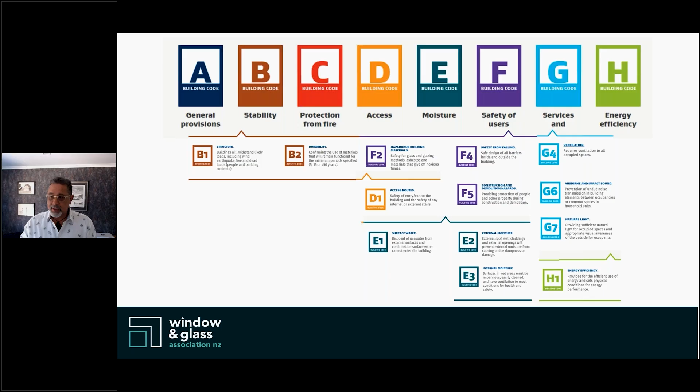It's kind of symbolic that these two icons are set so far apart on the slide, because like most parts of the code, they're typically considered very individually. So initially, we're going to do the same, and we'll start by having a quick look at E2.

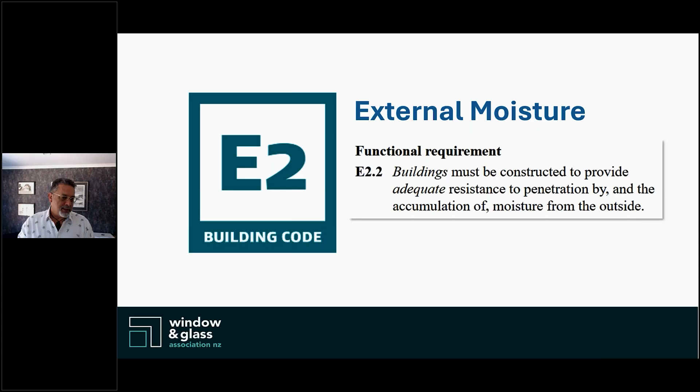So E2, the external moisture clause from our building code, is basically the regulation that sets out how our buildings should manage external moisture. The functional requirement of E2, and I really like this paragraph, is that buildings must be constructed to provide adequate resistance to penetration by and the accumulation of moisture from the outside. That is exactly what we're trying to do every time we look at a window detail. We're trying to keep the water out and make sure it doesn't accumulate in that space.

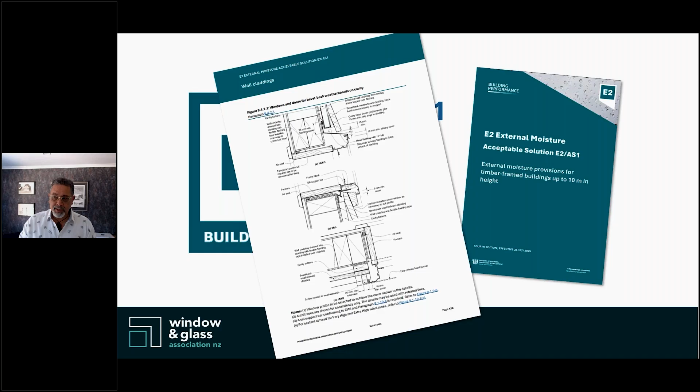Of course, E2AS1 is where the acceptable solutions are listed and nominated, which looks at all junctions of the building envelope, not just those relating to windows and doors. But there's a significant section in there relating to my favorite subject.

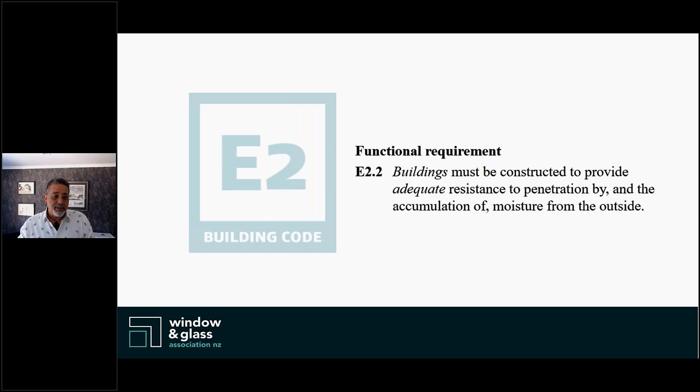Okay, so with E2 and E2AS1, there's a bit of a story I'd like to go through. As I say, the intent of E2 is to keep external water on the outside of the building, and we've not always done a great job of that, to be fair.

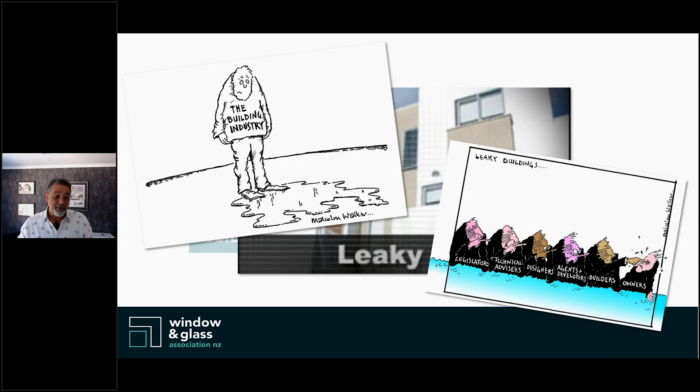In the early 2000s, it became very public, our $2 billion leaky home syndrome. With that kind of pressure, the whole building industry was compelled to develop solutions to a very public but very, very real situation. At the time, building consultants Prendos published some analysis of their experiences, and they were actually blasted for doing this in the newspapers, for exaggerating the situation, which turned out to be completely untrue.

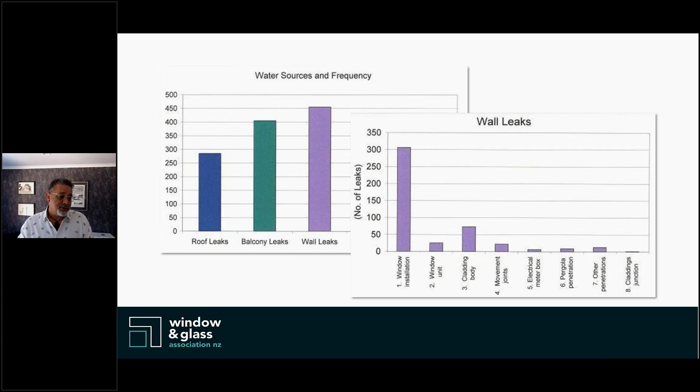The window industry collectively took note of this information and decided to take control of this particular area - the space between the window and the building envelope, the installation. We decided we needed to help out and develop a better method of installing windows, given the pressures that were going on at the time.

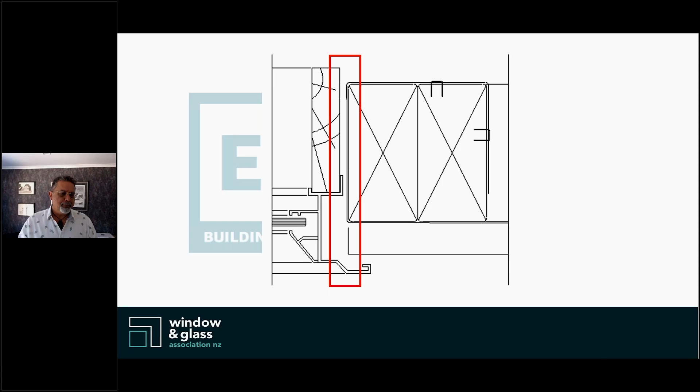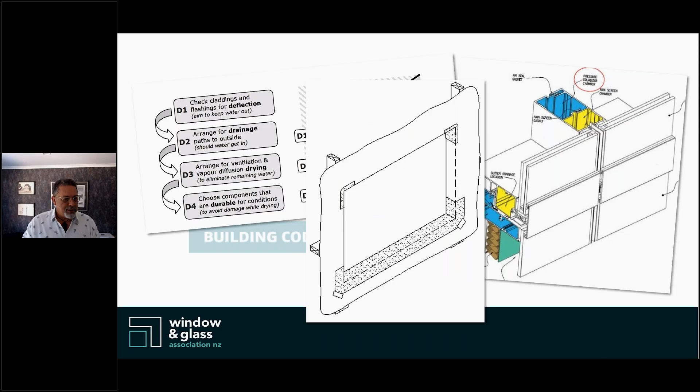We considered the 4 Ds. We took what we knew about pressure equalization from curtain wall design, and we acknowledged that we needed to protect the opening, remembering, of course, at the time that the code allowed for the use of untreated timber.

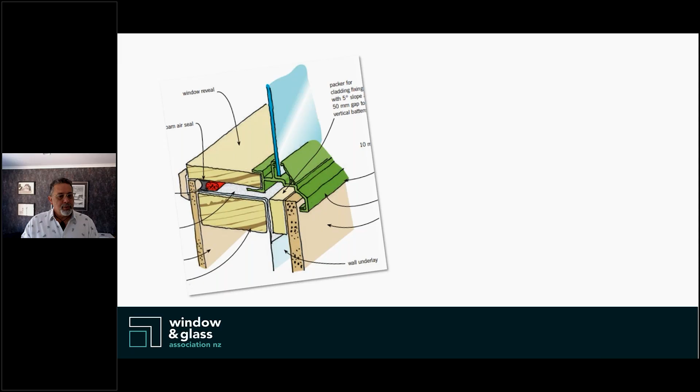At the same time, BRANZ were evaluating the use of cavities between our framing and our cladding, which pushed the window out of the building and away from the support of the framing. So our solution to that was to develop a support bar that not only supported the weight of the window, but also provided adequate drainage and ventilation paths for the window cavity, to help that pressure equalization around the window cavity and help keep water out of it.

In 2005, we published this as WANZ WIS, the Window Association of New Zealand Window Installation System. At the same time, the DBH, as MBIE were then, published their version of our details. We talked to them about the details, but there wasn't complete agreement across all parties, so they published their version in E2AS1, the 2nd edition.

And for a long time, we actually competed in the market where some councils liked WANZ WIS, some preferred E2AS1, and designers had the same kind of issues, I suppose.

In 2009, we got together - MBIE, or DBH, MBIE, I can't remember what it was at the time - and we rationalized the 2 documents. In 2011, the 3rd edition, as we know it, was published. It merged the two. There were compromises from both parties to find one set of details that we've now used for a very, very long time.

In terms of H1, the story is not quite as flowery, I suppose, not quite as interesting. The functional requirement of H1 is set out in 1.2, and there's the acceptable solution. The acceptable solution for H1 has, as you all know, 3 methods of compliance: the schedule, the calculation, and the modelling methods. But none of these are new.

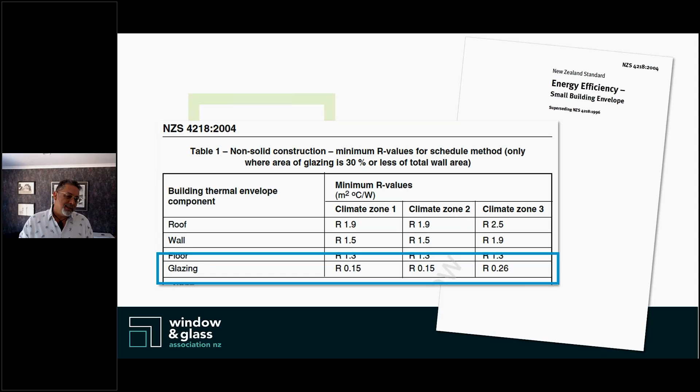None of these are new. Early iterations of H1 mostly made reference straight back to NZS 4218. In 2004, the schedule basically allowed for single glazing across most of the country and clear IGUs in the south. In 2009, this was updated to essentially make clear IGUs mandatory across the country, unless of course you were calculating or modeling to use something else, but why would you?

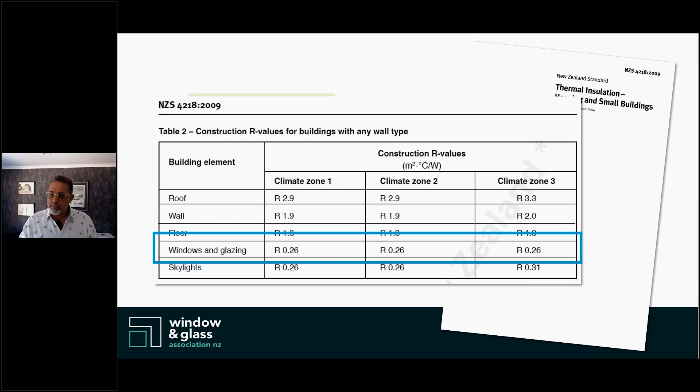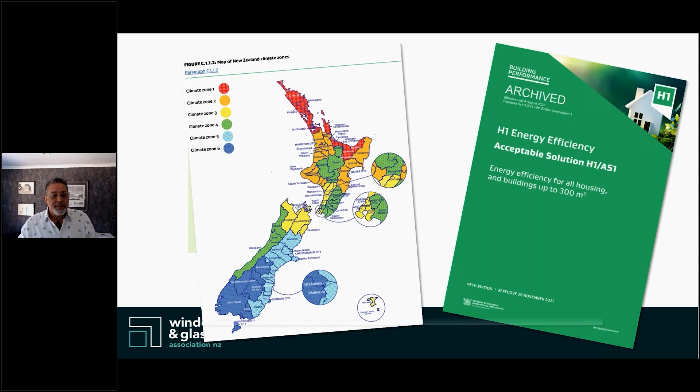This is kind of the date where everybody says double glazing became mandatory. And yes, it was, but it wasn't. Then in 2021, the 5th edition, which we all know very well, was introduced, along with 6 new climate zones - the country divided into 6 new climate zones - and significantly increased performance requirements for windows and doors.

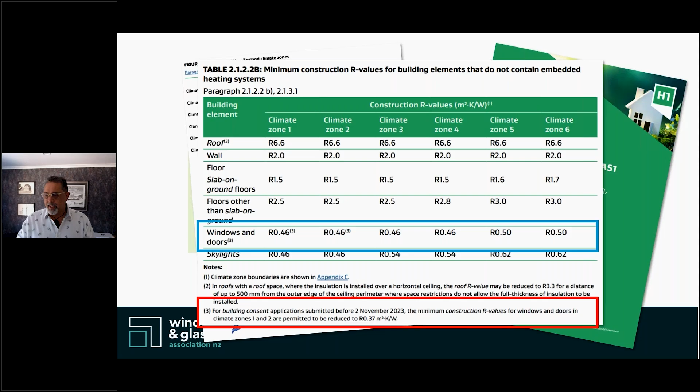This step changed our industry significantly. Thermally broken frames and high performance low E glazing were no longer optional extras - they were a requirement moving forward. There was, of course, an introductory period that allowed our industry to get up to speed with the material supply issues, but we were all aiming for these new higher performance values.

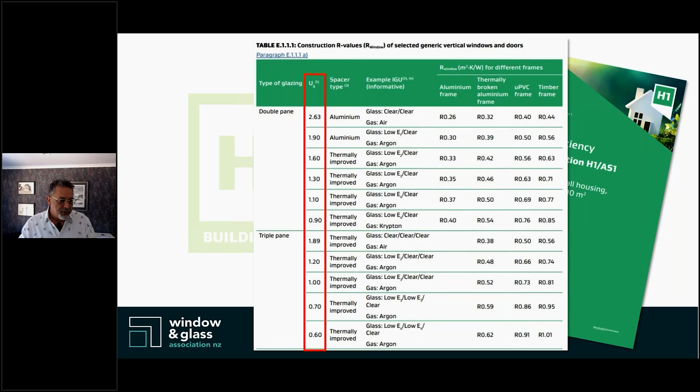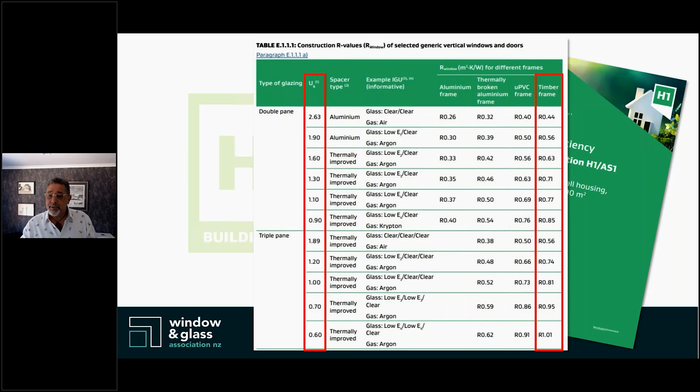Also introduced as part of the 5th edition was table E1.1.1, which gave improved guidance on the expected performance of frame and glazing combinations. We took glazing U values and matched those to the frame types to give an expected thermal performance. These were taken from standard available products. Apply those U values to an aluminium frame and you've got this collection of R values, thermally broken, UPVC, and timber framing - a really useful tool when using the schedule and trying to understand from a design perspective where you might position your product specification.

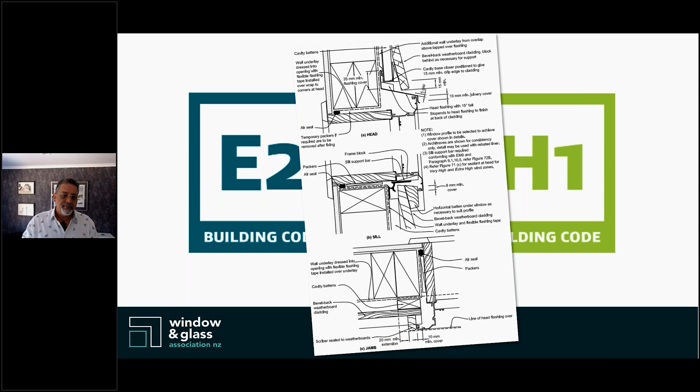So again, these two clauses are typically considered in isolation, which does start to raise concerns for building designers as they work through their projects. Okay, so we want to install the windows in our project in accordance with E2AS1, which is fine when we have a simple window. But when a better performing window is required to satisfy the demands of H1, that detail impacts the overall performance of the window itself, because that aluminium support bar, which is doing a job holding the window up, is now also bridging the thermal break in the frame. So you're reducing that overall performance, which is obviously not ideal.

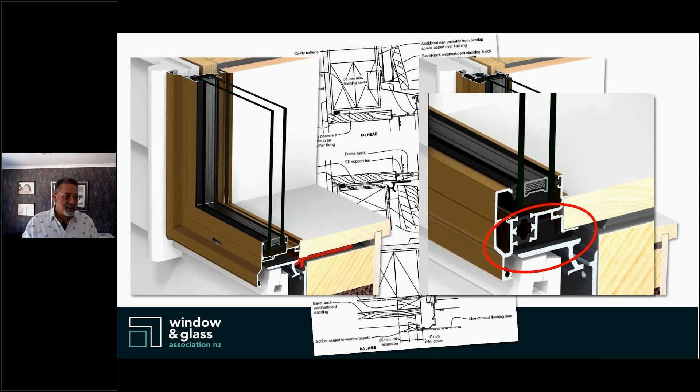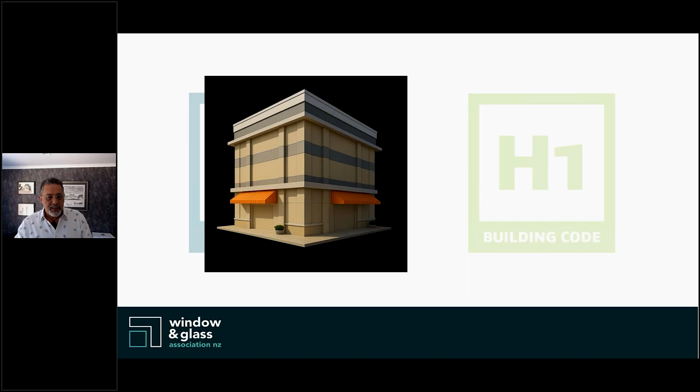From a technical and detailing perspective, designing a solid form is pretty easy, right? If you don't need light, ventilation, or access, the envelope details become really easy. When you do decide you want light, ventilation, and access, things get a little more complex. In lecturing with architecture students, I've often made reference to taking a sleeping bag, cutting it full of holes, and then covering those holes back over with Glad wrap. Not only have you increased the number of potential leaks in that sleeping bag, but you've also dramatically decreased the thermal performance of its envelope. And this is what adding light, ventilation, and access to your building does.

It creates complexity. To respond to that complexity, I refer to the hierarchy of design. Now, a lot of architects like to talk about form following function or form over function. And I guess the difference between the two depends on how much money your client has.

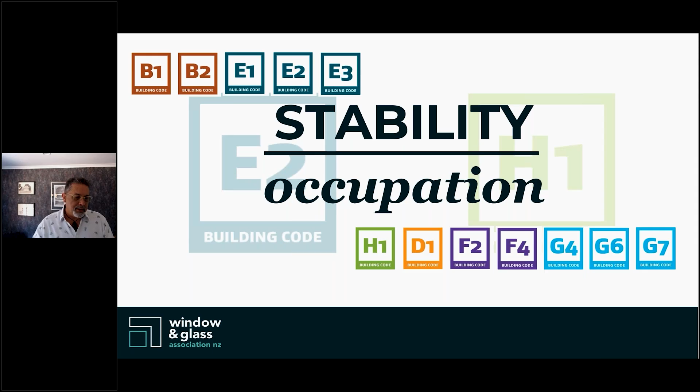But if we take that equation and modify it slightly to stability over occupation - stability is about ensuring the integrity and durability of the building itself, which might involve these particular clauses of the code. The occupation part follows these clauses; it's about making the building safe, efficient, comfortable, and healthy for its occupants. So stability is vital, because without that stability, occupation can't occur. In terms of our clauses, E2 fits with that. E2 ensures that the building continues to be useful throughout its intended life, and H1 ensures the same for its occupants.

In terms of design considerations, when you're looking to develop window details, you need to consider how you respond to those complex junctions we've talked about. We go back to the PRENDOS graph - in my experience, water ingress almost always presents itself in the lower corners of a window or door opening. Whenever you go to a home where there might have been a problem, water is present at the lower corners of the frame, and this often leads to the conclusion that the ingress is a result of window failure itself. But when you look at this graph, it's actually grossly untrue. The vast majority of failures come through the window installation, at the connection between the window and the building envelope, which is why as a window industry, that's just where we decided we needed to focus in terms of developing those details for E2AS1.

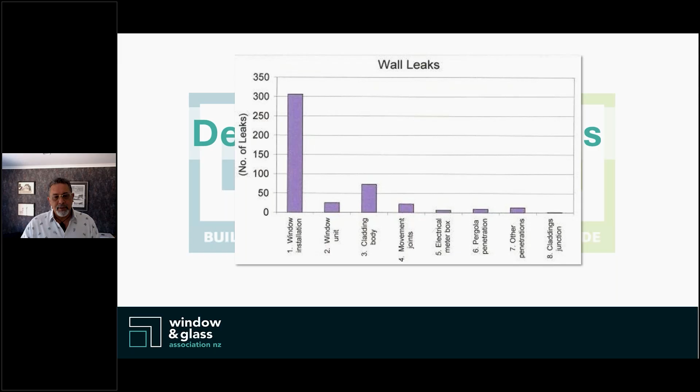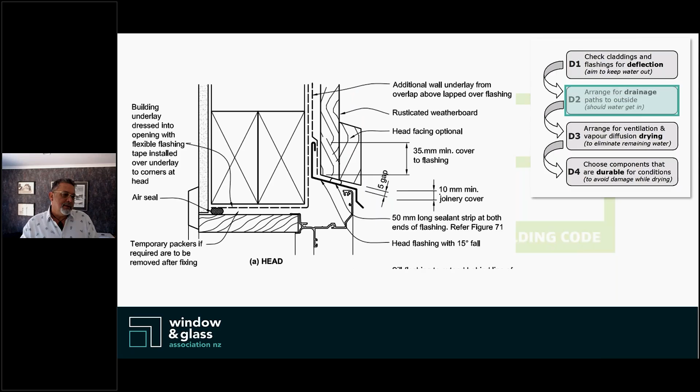One of the first tools we use in developing an installation detail is to apply the 4 Ds of weather tightness to any situation. So if you started looking at a head detail, deflection is the first D - you deflect water away from any potential risk points. But you accept that you aren't always going to deflect everything away, and then if water gets in, you need to provide a drainage path to allow it to get out. Apply the same thinking to a jamb detail - again, we're deflecting that water away wherever we possibly can, that's what the scriber in this particular case is doing. But accept that if water gets through, there is a drainage path to help it get away from the building.

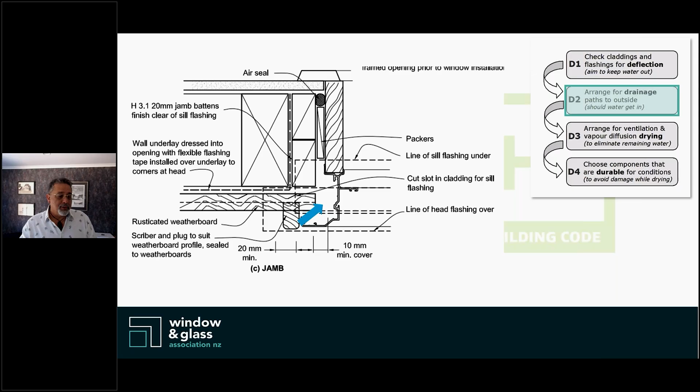Sill detail, really similar. We're deflecting that water away, and providing drainage paths should water get into the system, to allow it out. But when draining away, there will always be residual moisture left behind. So to deal with that, you look at ventilation and drying out that residual water by creating ventilation into that space.

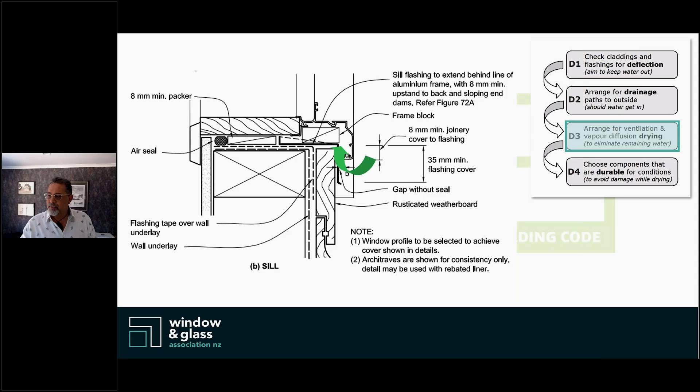The 4th D of weather tightness is durability, just ensuring that all the materials you use are durable throughout this whole process.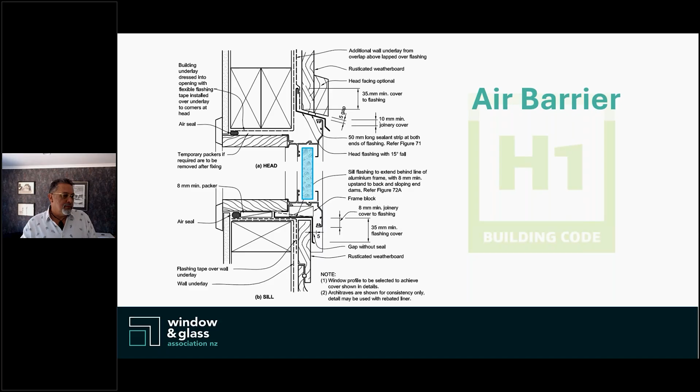You might also look at the layers of the envelope. You start with the drainage plane, the line of the air barrier, and then the layers of insulation and where all of those sit. You must recognize that not all of these will always be perfect, and the final design may require compromise in one area or another. Anything is possible, but that cost versus buildability equation becomes a factor.

John's already touched on this. Back in early 2018, when we were going through the development work leading on from the 5th edition of H1, BRANZ called a workshop to consider recessed window installation details.

We gathered at ProClima. Submissions had been called for prior to the meeting, received from a wide section of the industry, not just the window industry but the whole building industry. These submissions were hung around the walls, and a group of building industry people and professionals were asked to wander around and rate them.

They rated them in terms of weather tightness, thermal performance, durability, buildability, and cost, based purely on the information put in front of them. The majority of these details were already being used in the marketplace - there wasn't a lot of new detailing or new suggestions within that space.

The outcomes from the workshop were analysed, and MBIE set up a working group to start considering the issue in more detail. Now, prior to this meeting, the window industry had actually completed some work, and we offered this up to MBIE for consideration. We'd done some design development and testing, but MBIE had some concerns about the work we presented, and wanted to address some items very specifically.

They wanted to address buildability. They wanted an industry review - we'd sort of started with that - and the development of the working group was required.

There was a question around the verification method being used to assess window installation details. E2VM1 had some very focused details about how you go about the testing, so we wanted to investigate that.

And then of course durability. So we were bringing three building clauses all into one detail development, which is kind of unusual. Our work was parked, and we began assessment of some new options.

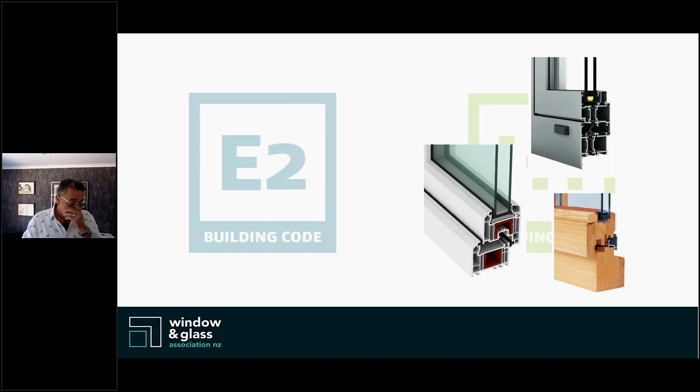Initially the working group sat down and we just looked at two frame types: facing frames and non-facing frames. Facing frames are traditional aluminium frames, whether cold aluminium or thermally broken, and non-facing frames were UPVC. We moved away from material terms because both materials have both frame options available - you can buy a UPVC window with a facing, and an aluminium frame without a facing. So we went with those very specific terms.

At this point we decided not to consider timber joinery. The timber joinery detailing was just so different to all of these. When talking about developing an acceptable solution, timber windows were a step beyond where an acceptable solution might sit, certainly at the beginning of this process.

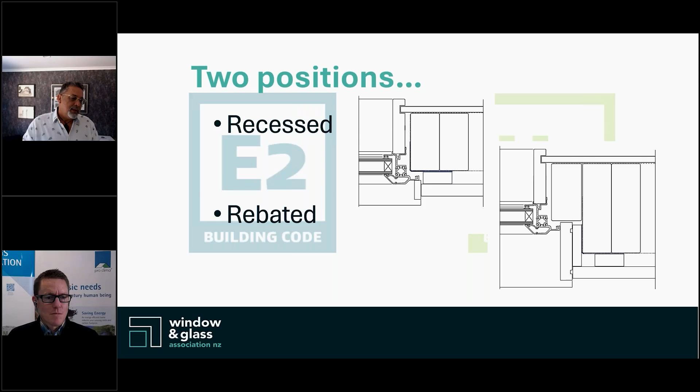We then considered two different positions: one where the window was recessed, basically back to the building wrap line, or rebated, where a rebate was formed within the wall line and the window moved to that position. Those four combinations were considered and debated, and in the end, in terms of an acceptable solution, we settled on just two frame detail combinations - a recessed facing frame and a recessed non-facing frame, so aluminium and UPVC. Rebate details were just too complex to weather adequately in terms of an acceptable solution.

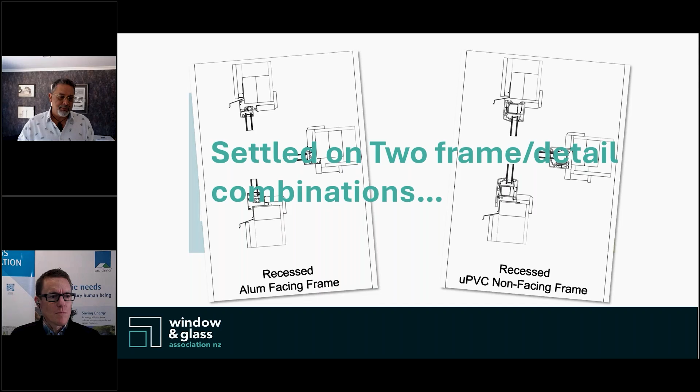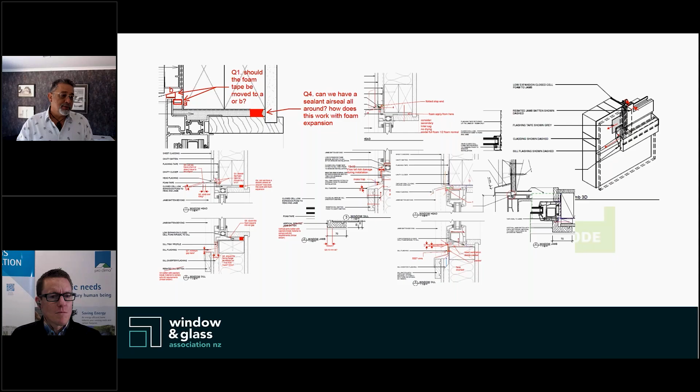There was lots of to and fro, where details were drawn up and comments were made, going back and forward in the working group. We talked about it a lot. We had an idea of where we wanted to go, but we refined, talked and tested until we confirmed our details. This is what we wanted to do.

At that point, details were drawn for both facing frame and non-facing frame, and MBIE commissioned BRANZ for a 6-test program. The initial 4 tests were developmental tests, and then there were 2 final verification tests.

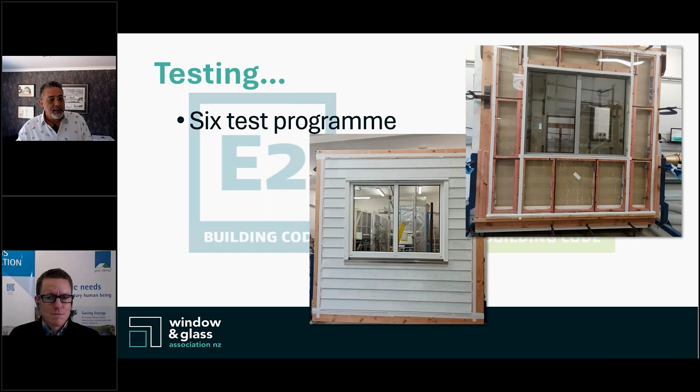We went through that process and did lots of development work. A standard verification method: you build your test unit, put it in, test it as designed and built, then introduce failure and test again, then do water management tests where you introduce failure, understand what happens with the water in that failure, and how the wall holds pressure across it. This testing, we did far more work than that.

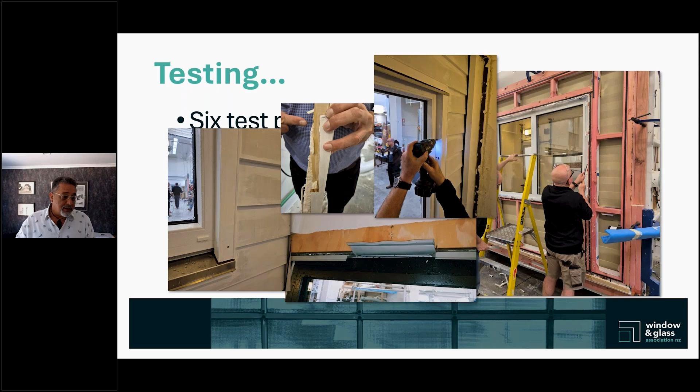We were constantly pulling things apart, seeing if there was water in places we couldn't see. The testing was robust, to be sure. We did a lot of that, went through all of it, and in the end we were actually pretty happy. We got through all of our testing. The details, the final 2 tests, proved that everything we designed did indeed work and worked well.

So we got through the E2 part of the testing. Then we moved into trying to understand how the details were going to perform thermally. We did some initial modeling. I think there is some more to be done, but the initial modeling showed this.

This is the thermally broken frame installed per E2AS1 - facing frame, aluminium support bar, which you can just see under here. So just to establish a base.

The initial modelling showed - for those unaware, with the modelling we set the outside temperature at 0, the inside temperature at 20 degrees, and then understand where the weak points are. The weak points in each of the details, in this particular model, were all right in the same location at the back of the condensation channel, right against the vertical upstand that holds the glazing. So with a 20-degree indoor room temperature, we had essentially 10 degrees at the weakest point.

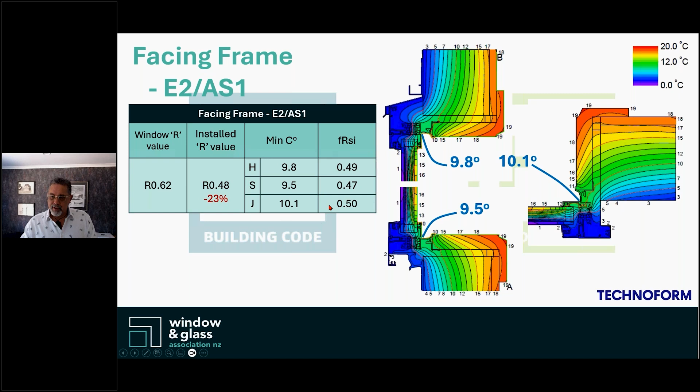Listed out, these are the temperature minimums and what our FRSI factors look like. We compare that to our recess detail - our temperatures at head and jambs increased 2 degrees, which is reasonably significant. At those kinds of temperatures you'd actually typically get above a standard dew point. But there is a weakness down here at the sill.

That comes about from the aluminium sill tray in under here. With the head and jambs, we removed the air cavity from around the window in the building envelope and filled that full of foam right out to the front edge. But at the sill, because we needed to ensure the E2 part of this detail would work - that we had drainage - we've used an aluminium sill tray, and that has brought temperature right back into the inner face of the building. So we have a weak point here for sure.

Interesting though, and like I mentioned earlier, everything about developing these details includes a compromise. Our window went from 0.62 to 0.55, so we did have an overall increase in performance, or less of a decrease, however you want to view it. FRSI numbers reflect those temperatures as well. Not a perfect detail, but certainly one that performs better than the E2 version.

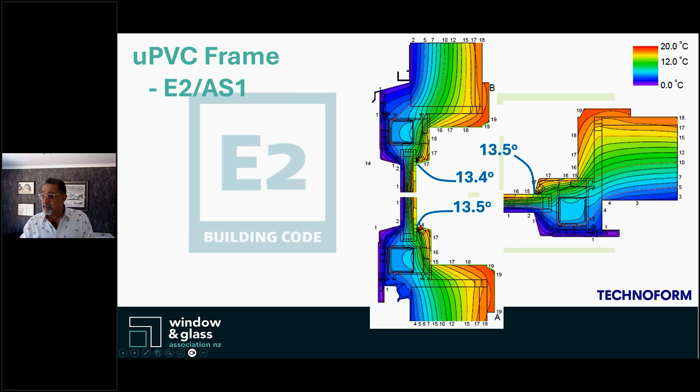Have a look at the same for UPVC. Yes, this UPVC frame has a facing because E2AS1 requires a facing. Here, temperatures are all in the same place again, that point between the frame and the glazing, at pretty solid numbers of 13.5 degrees. So the UPVC window, again with the 1.1 glass in it, has an R of 0.79, a 22% drop once installed per E2AS1, and really good solid figures around the rest of the installation.

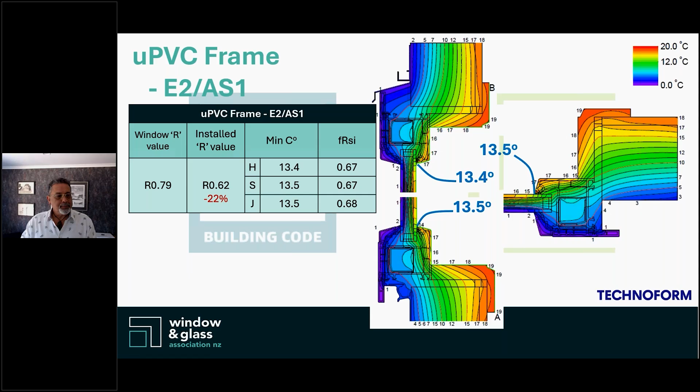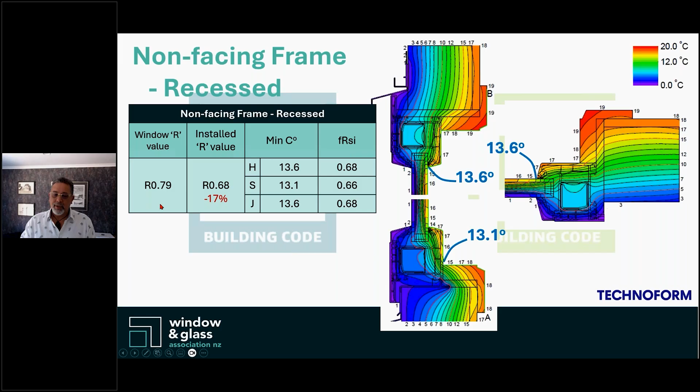The recessed version of that - our head and jamb figures stayed almost the same, slight decrease at the sill, and again less of a decrease in our installed R value, which is good isn't it. So when you compare all of that, the recessed frame, recessing the window back into the building, makes an absolute difference. There's just no discounting that.

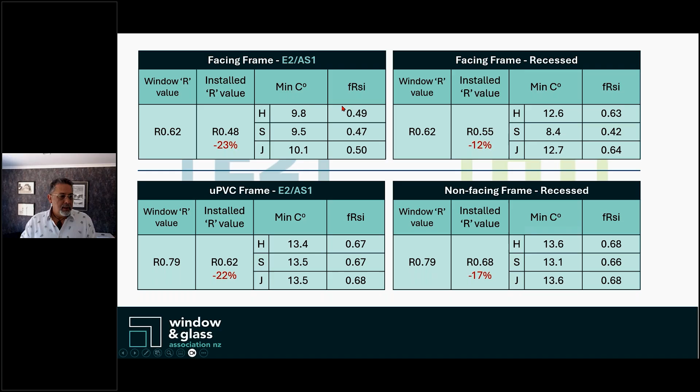All right, so that's the work we've done. What's next?

This testing and development of these details is a relationship between BRANZ and MBIE. The testing's been done, the reports have been written, everyone is comfortable with that. MBIE at the moment, as I understand it, are outsourcing the drawing of the details, and I think they're going to go for a more robust detail than what we've seen previously in E2AS1, just to help people understand the buildability of that. So that is being worked through. At this stage, we have no timeframe around the release of the details. The Window and Glass Association have reached out to MBIE and asked if we might publish early as an alternative solution before it becomes an acceptable solution. At this stage, that has not been allowed, given that the details are still being drawn and MBIE is still working through their policy. So, but yeah, that's where we're at.

Rob, I wonder if I can just jump in there. Absolutely, please. Yeah, I'm done. So you're done? That's great. Sorry. No, good as gold. Okay, so there's been a string of questions across the time so far, so maybe we can circle back to a few of them.

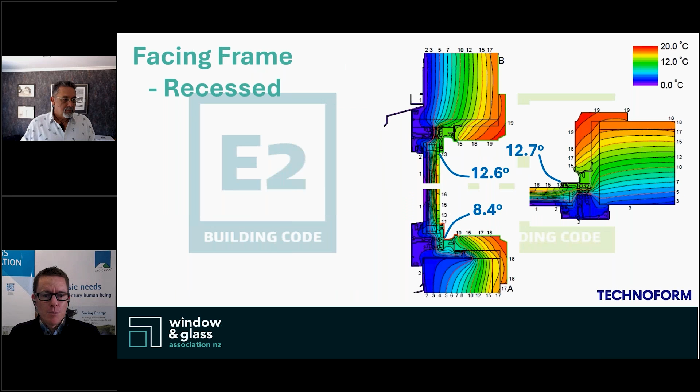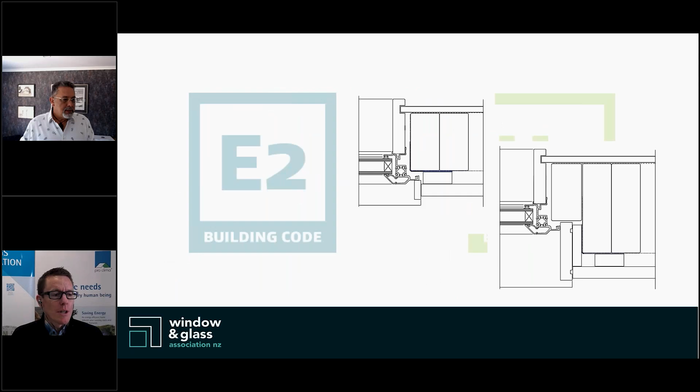All right Rob, could you go back to your detail on E2AS1 with your facings? So the question is, E2AS1 requires a facing, stated in quotes. What does this mean? I'm not sure what that question means. Well, let me ask it a different way then. Could you just describe the difference between a window and a window with a facing? What does that refer to?

So, okay, if we just use this image here, this is a traditional aluminium window, and the facing is this part from here to here. When aluminium windows were originally developed back in the 60s, they basically took a timber frame, a block of timber, installed into the building. It had a facing nailed on the outside to cover the gap between the window and the cladding. So very early extrusion design included that aluminium facing, that cover, that lapping component into the frame.

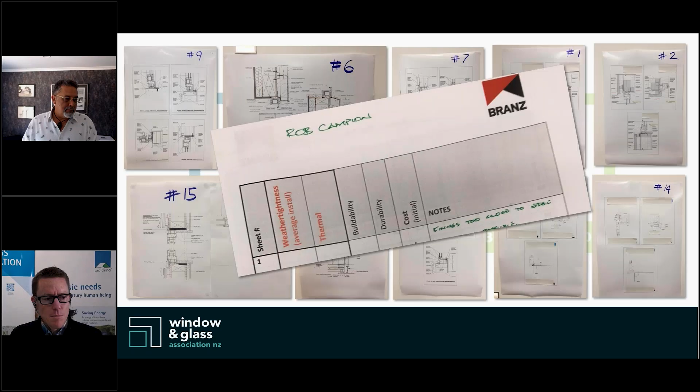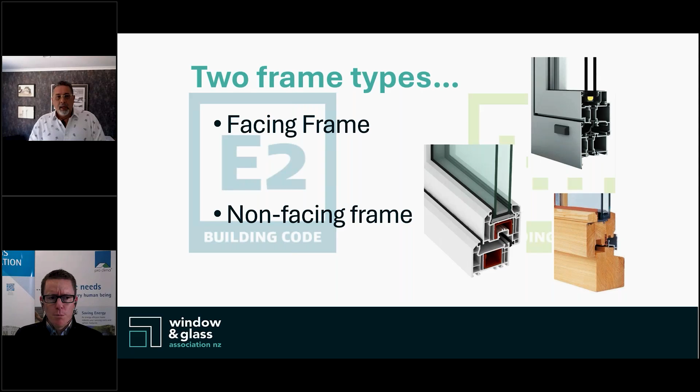Right, so other wording for that, chair frame? And I don't know whether this is just me, but chair frame tends to be more hollow in this space here. But a chair frame, an equal leg chair frame, is effectively a non-facing frame, yes. So it's kind of a bit of a nuance there, but it's about the old shape of a window trying to be replicated in an aluminium extrusion. Without real purpose, exactly. Is there a purpose hiding in there that we can't see?

It's about deflection, about covering that joint, covering this weak space here. Okay, that was its intent. Well, I can safely say that we've hung on to that for 60 years, for whatever reason. Yeah, that turned out to be a really great question, and I learned something too, so that's good.

Do you know if the Prendos report is available online? And if so, let's try and find a link. No, it's not. Those graphs were, like I say, from 2002 or 2003. I'm fortunate enough to have found copies from when I used them 20 years ago, but to the best of my knowledge, they're no longer available on the Prendos website. I'm sorry to say.

Right. Maybe we could say that if anybody else online does have access to that type of research and data, that would be pretty useful to share. So, do you have any? Way out of date now, it's 23 years old. It's out of date, but it is the information that we worked from in the development of E2AS1 as we know it.

Do you have any testing data on how external insulation outside of framing impacts the installed window R value? And no, that wasn't a loaded question from me, Rob.

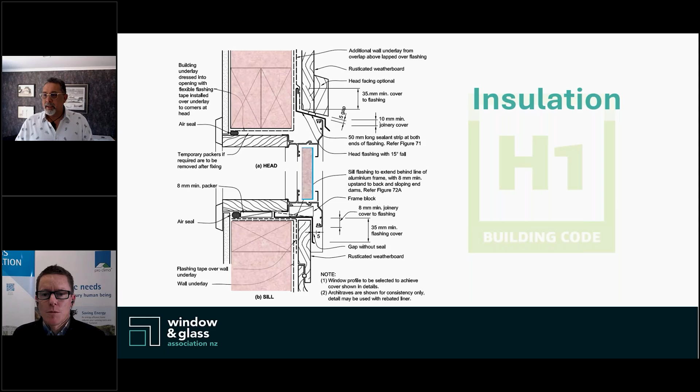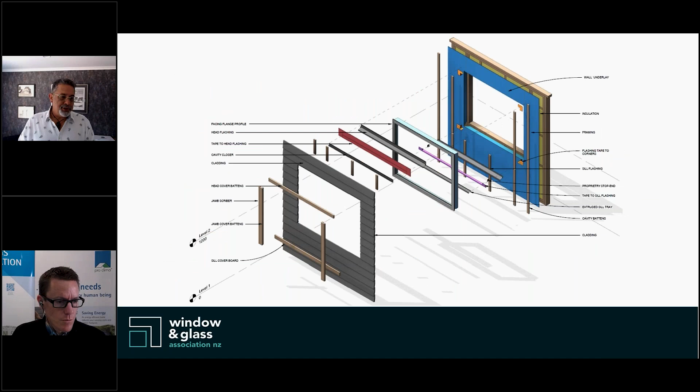Did the thermal modelling account for different wind zones and the impacts these would have on results? No, it did not. The thermal modelling itself didn't include any cladding, but the boundaries set for the models assumed a partially ventilated space, so there was some pressure on the wrap, but it doesn't take into account variations of wind zones.

Did you mention sill support bars act as a bridge? Should the sill support bars have a thermal break then? Thermally broken support bars - that's a new one. When I look at that picture now and what a support bar looks like, adding a thermal break might just make it a step too complex. We've looked at other materials, we've looked at putting skins across the top of it as separators, just to separate the profile of the extrusion. Because when you put that thermal break, like in the image there, it's already sitting outside the building line and already a long way from the insulation, which is that disconnect for the energy efficiency question - even though it's a thermally broken aluminium frame.

I think a much better result is just recessing the window back. And to be fair, architecturally, I quite like it anyway.